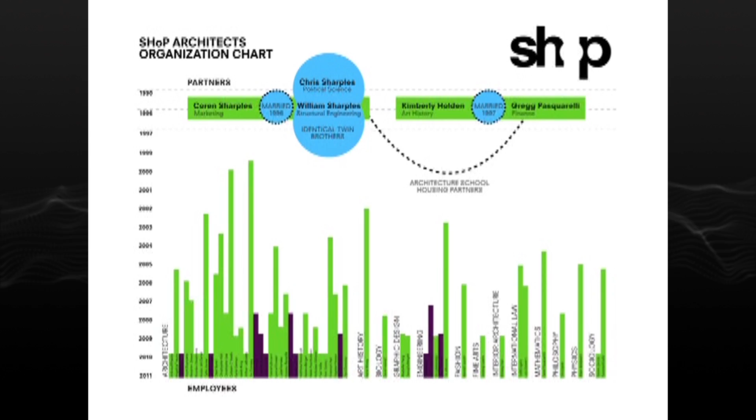The sort of brutal semester at Columbia is the first semester of second year, when you're forced to work together in a housing studio. The beginning of our office came from when Bill and I were housing partners. It was also the same year that A Thousand Plateaus came out, which was a horrible book to read right when you're starting to do housing. And so we struggled through it all year. We had this great semester.

We threw our project out 12 times. And at the end, we said, you're a great guy, but the one thing we should never do is practice together. And almost 20 years later now, we're still practicing together.

So we're now a firm of about 90 architects in New York, and it's changed and grown very rapidly. I'm going to sort of break down the office. I figured the best thing to share with you is how do you go from 5 to 90 in 12 years, because I think that's a kind of interesting story and the things that we did. So there's Shop version 1.0, 2.0, and we're right now starting to launch Shop version 3.0.

So what brought the 5 of us together was this diagram of the last 150 years of architectural history, or of the practice of architecture. When we were in school, which is now frighteningly a generation ago, there was this real division going on. Our professors actually asked us, so what are you going to do? You guys are pretty good. Are you going to enter competitions and do really cool buildings and try and win one, and think and teach and do this stuff? Or are you going to learn how to build and actually be able to pull off a large-scale building? We just didn't understand why you had to make that choice.

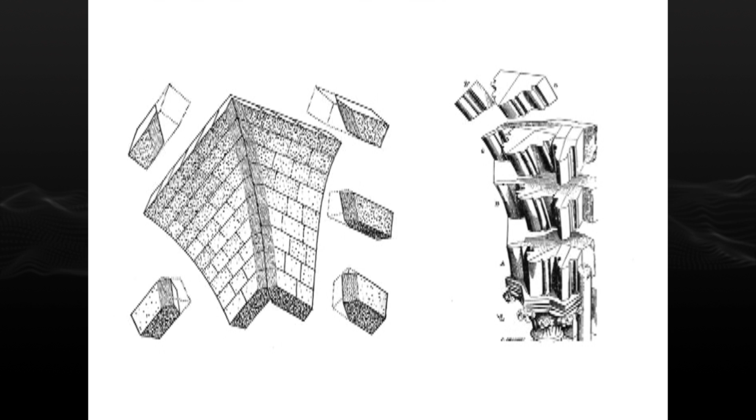So whether it's several of the hundreds of shaped bricks in Brunelleschi's dome, or 3 of the 4,000 uniquely shaped pieces of zinc on the Porterhouse, it was about architects starting to move beyond just the aesthetic or the image of the building, but getting into what we called the thickness, this idea of the depth of all the things that come together in order to make a building and to make cities.

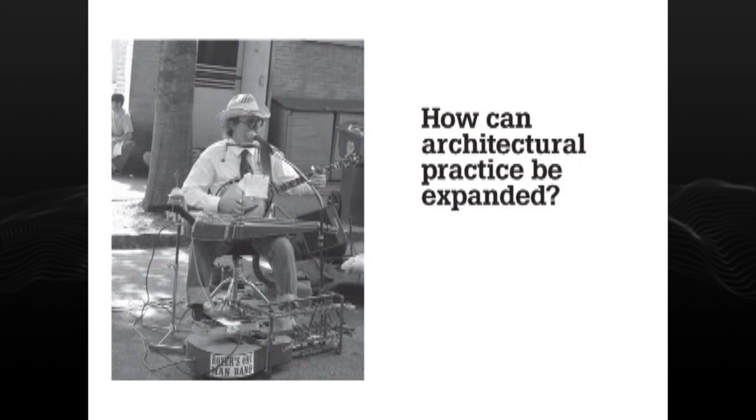So we started to really think, how do you expand practice? What are all the things that we could do? Shop version 1.0 - I think some of the first projects that got a little notoriety were things like we did for PS1 in the courtyard, our Dunescape project, where we had this direct relationship between the performance of a beach, the way in which it would be assembled, and the kind of time and budget that it would be, as a piece of both art, sculpture, and architecture.

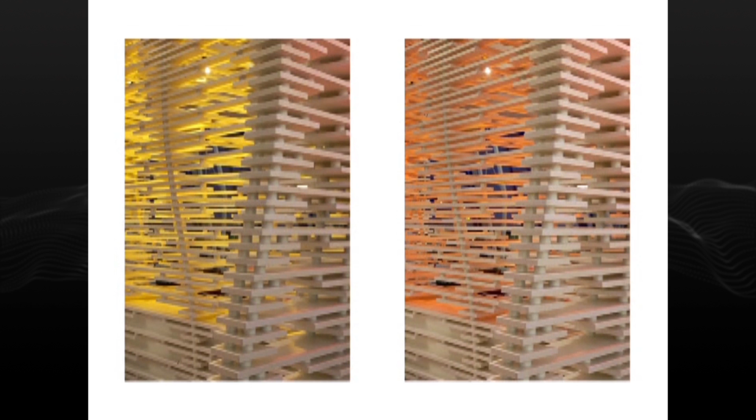Richard Branson saw that piece and asked us to do the first-class lounge at Virgin Atlantic. Again, a very similar kind of system where we had to break - it was right after 9/11 - we had to break the rules of how you actually built in an airport and use technology to get around it, to make this thickness of surface, structure, and program, and support services, and lighting, and aesthetics, and delight into these kind of pre-made elements.

Our park out on the eastern end of Long Island, the first major competition we won to do this, to reinvigorate a town about 100 miles outside of New York City with a series of different buildings, a carousel house. And eventually the last building we did - a lot of this was done with CNC technology, very early ideas about changing the kind of drawing types.

But the last building we did at Mitchell Park was a Folly, a program requested by the mayor of the town to do a camera obscura. We felt that we were now in practice about 5 years, and we were really teaching a lot of this stuff, mostly at Columbia at the time.

And we said, could we make a building? It was small enough, and we had just enough skill, we thought, to try and pull it off. That was a pure performance envelope of a building that was completely derived from the scripts that we wrote, and the entire building would be fabricated by the computer and assembled on site.

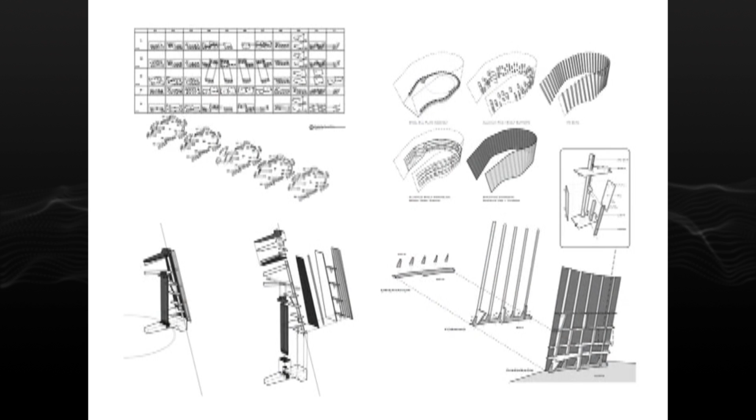And this was when the drawings really started to change. These are actually 4 drawings from the CD set itself. When we finished this CD set and looked at the drawings, we didn't even realize we were doing it, but when we handed it into the building department, they said there are no dimensions on this set. And we realized that dimensions were no longer needed.

And the building went together in 6.5 weeks with 2 men popping it together, every single piece - 2,400 and something pieces, no 2 alike. Every single one arrived on site, pre-cut, pre-drilled, pre-numbered, pre-lettered, basically popped together like the most kick-ass piece of IKEA furniture you've ever seen.

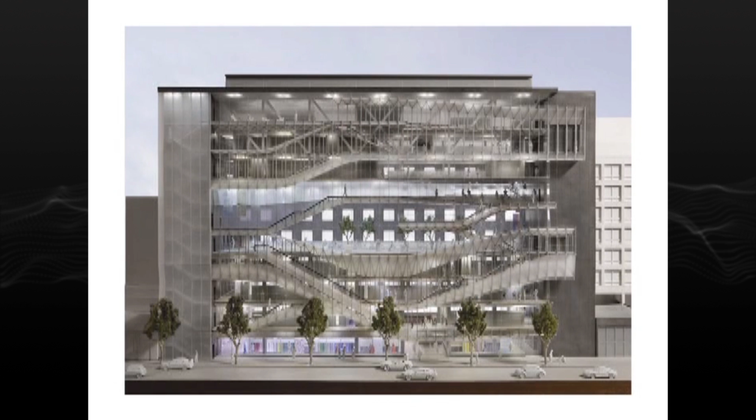And then sort of ending it out, this was a competition we won to do a new academic building at the Fashion Institute of Technology. We were starting to get a chance to build at a bigger and bigger scale. This building takes a mostly brutalist campus in Midtown that's one of the great fashion and design schools of the world, and we said to the president, we're going to give you open heart surgery. We're going to crack your rib cage, open it up, and show what the students are doing, where the entire facade becomes almost like an ant farm of design and exhibition spaces.

This building has been on again and off again for many years. We won the competition in 2002, but we've just heard it might be coming back to life, so hopefully we'll get to build it. The CDs are actually done and have been done for 5 years.

And then even some of the things we've done for clients that we can't talk about, concert halls and secret labs and things that are really bad black ops kind of stuff, but they wanted really beautiful stuff and we're willing to pay for it. So that was kind of all version, I can't really talk about it. I'm sure someone's in here watching me.

So this was all kind of version 1.0, where it was, how do we take that diagram and begin to manipulate it? We're not saying you can do that on every project, but it was integrating with the subcontractors, integrating with other designers, integrating with our clients in different ways, with cities in different ways, with manufacturers in different ways. Different kinds of projects had different opportunities to do that in different ways.

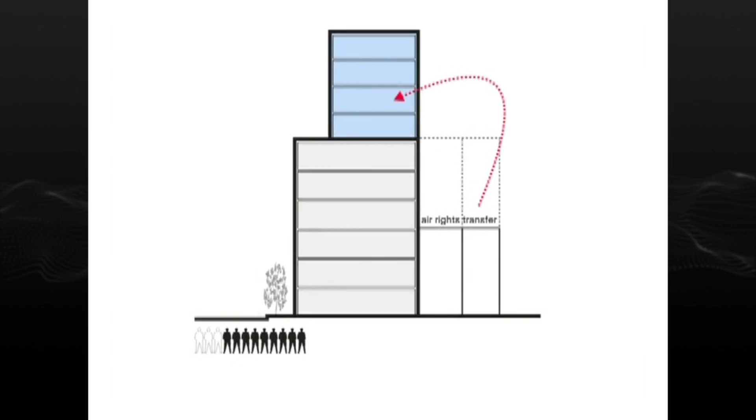Now the problem was there was a 120-foot height limit in the district, and there were setback requirements from the side streets, so there was only so much you could go, unless you started to push it out and cantilever over the buildings to our south. A few less people thought of that idea. And of course, the more you could cantilever, the more revenue you would get, until the cantilever got so big that it started costing more — a rate of diminishing return.

We got control of the project, and we did all that ourselves. Then we were like, how are we going to pay for this now that we've won the bid? We really didn't have any money. So we talked to some of our clients and asked if they would joint venture and put money in, and we asked friends and family, and we built a fund, and we went after it. We ended up forming a joint venture with Jeffrey Brown Associates from Philadelphia and New York.

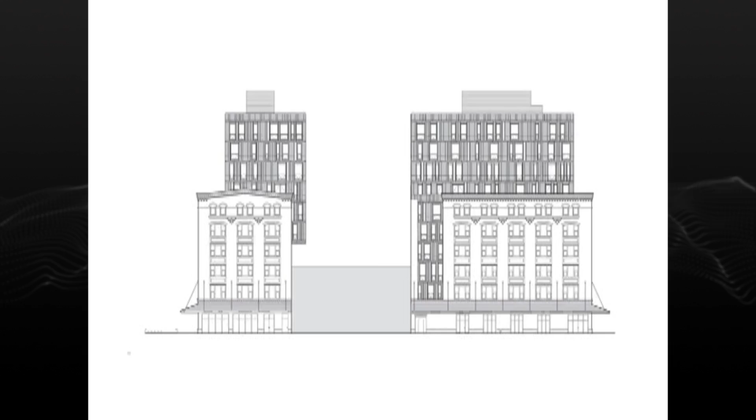We knew we would have two volumes, a historic volume on the bottom and a new volume on top. We felt our idea of contextuality is that the building should not necessarily look exactly like the building next door, so let's just do a super contemporary box on top. We wanted to try a metal building. We hadn't done any metal yet.

We didn't want any kind of painted material, we wanted a raw, natural material, and we had settled on the idea of a zinc building. So we went to zinc facade manufacturers, and the costs were through the roof. We didn't understand why it would be so much more. Zinc only costs maybe 10% more than stainless, which is 10% more than painted metal, so why would it be 50% more for the whole facade? They said, well, we don't really care, that's what it costs.

So we said, well, where does zinc come from? They said it mostly comes from France. So we got on a plane and went to France, found a zinc manufacturer, and bought 1,000 sheets of zinc that was 1 meter by 3 meters in length, brought it back to New York, and designed the entire building.

Here's a 1 meter by 3 meter sheet, so that one unfolded panel, two unfolded panels, or three unfolded panels, plus the bottom slab cover would fit. We had a 97% use of our raw material.

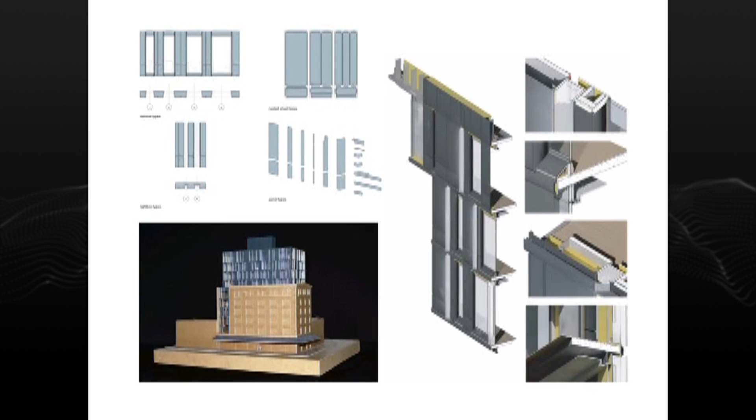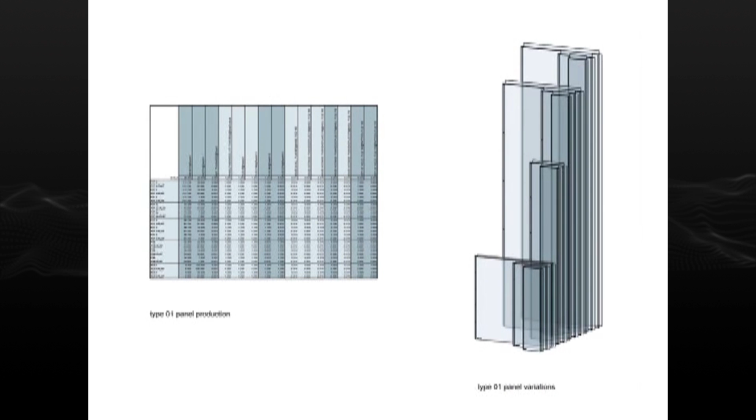But it was the first time we used SolidWorks, more than a decade ago. Instead of having to draw shop drawings, it was just a series of Excel spreadsheets, and it went directly from the digital model to the fabricators. The pieces were cut, they all had a code system laser cut into the front, which became the instruction set for how to put the building together. So the architectural detailing of the building, those instructions, still remains there.

We actually used carpenters to install it. We started at that corner, went all the way around the building, got to the other side, and we were 1/32 of an inch off. We were like, okay, that's probably good, and we should do this again. It was amazing, and we did it with zero shop drawings whatsoever. And so the building went together.

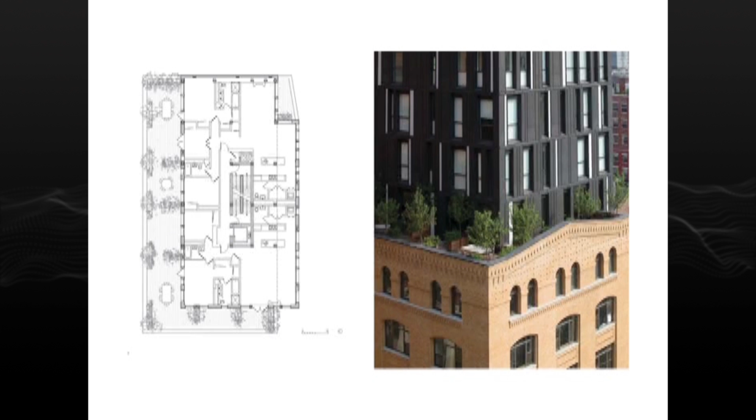It's 22 condominium units plus a retail space. We did the design, the financing, we helped manage the construction, did the model units, the marketing materials, and brought it to market. You can see the typical units, there's a central core, and the typical units have 3 exposures with big, large open spaces. The core becomes the lateral stability of the building, so no columns and no trusses holding up that cantilever.

One of the things we felt was really important was playing with the idea of depth on the facade itself to get this notion of texture. Sometimes I find metal buildings can be a little bit taut. I mean, sometimes that's very beautiful, but we really wanted to play with that.

So we set all the windows 14 inches back, and then we were like, wow, that's going to make a lot of ledges, and we have a pigeon issue in New York. So what are we going to do? So we called the Museum of Natural History on the Upper West Side, and we asked, is there an angle of repose that a pigeon will not fly onto? And they said, in fact, there is.

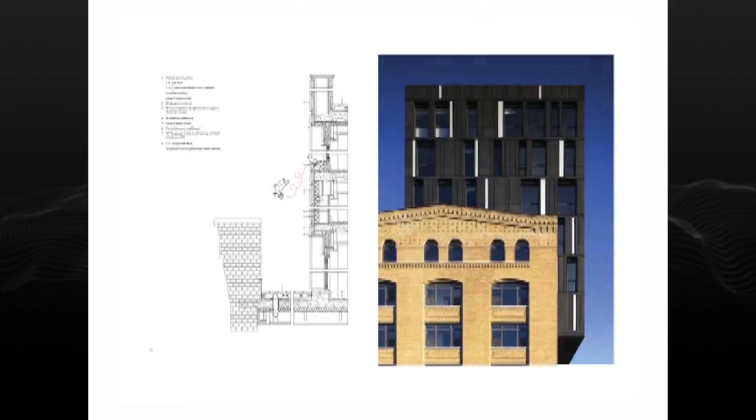It's 34 degrees. So if you look right here, these are actually parts of the drawings from our set, and you saw that everything was coded like F and P, different codes for it. These elements were labeled PS for pigeon slide. And it's amazing, because if you're in the building, you actually see a bird come and land, and it goes right off the edge. It finished in 2003, so it's 8 years later, and I'm really proud to say not one turd on the entire black facade.

So you could see the building, the collateral materials we developed, the lobby spaces, and then this whole idea of the building that lights up at night and has become an anchor for the district—something that we're incredibly proud of.

We brought it to market, sold it, and the interesting thing was—here's the biggest issue I have to talk about, the most important thing I can share with students especially—that as a young practitioner and a teacher, I talked to my friends and colleagues, people I have tremendous respect for, and I was like, we're thinking about doing this. And I have to say, at least half the people were like, you better watch out, you're getting in bed with the devil, this is a slippery slope to hell, your designs are going to go down the crapper because of this.

And I have to say, we were really kind of scared, to be honest with you. And I went to my dean, my former dean, and I said, Bernard, what do you think? And he's like, oh, don't listen to them. You have no idea—Corb did development, Loos did development. They all did this stuff on the side to help fund their other work. I didn't really know that, and he went through a litany of different architects, and we took a shot.

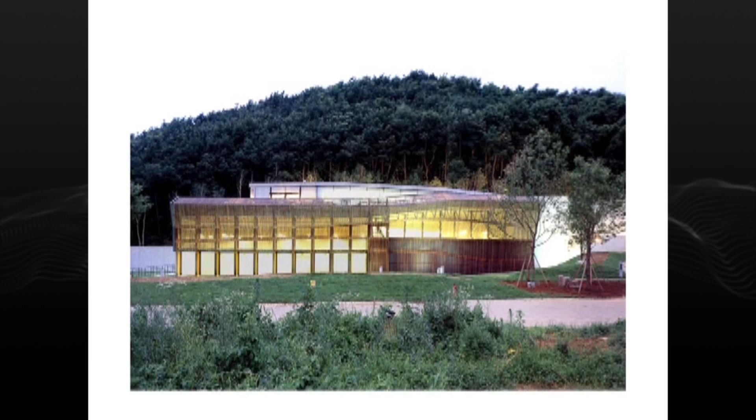This is a sort of book house, cafe, exhibition hall, part of the Heyri Art Valley, outside of Seoul, South Korea. This was a building where we could only bring it through design development and hand it off to contractors. So what were the kinds of drawings we'd have to make to ensure a certain level of quality?

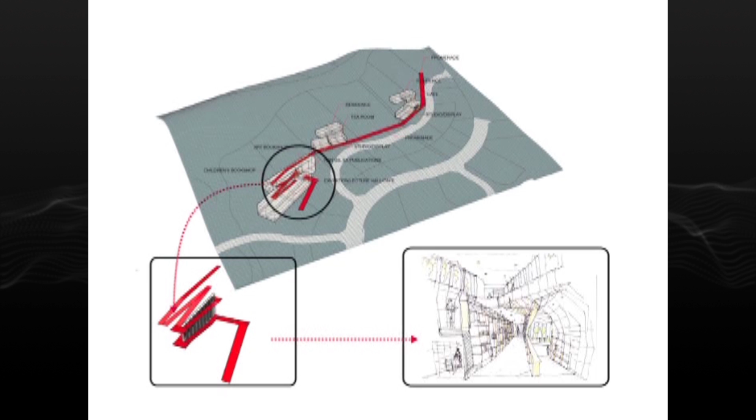The interesting idea of the house was that you actually entered off the roof, and then the bookstore, Hangil-sa, which is a book publisher—you go around a three-story high wall of books, which is the bookstore, and you come out at the bottom.

These are kind of the original sketches of it. We got this building built very quickly without us being on top of every single element. A lot of it was taking those ideas of full-scale template drawings, making it simple enough that it could be executed easily.

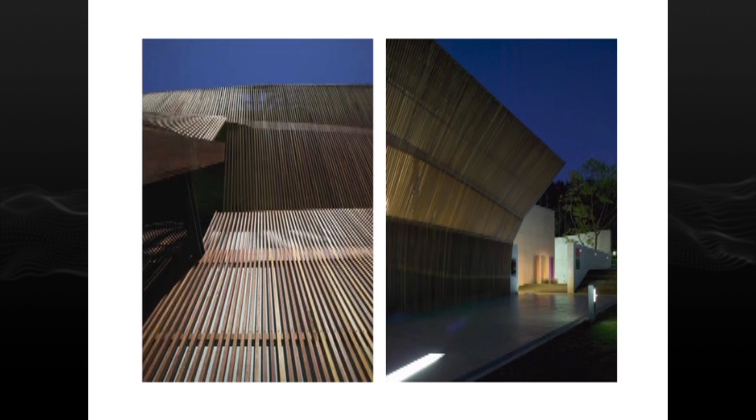Here's the entry as you come in at the top, and the screen wall. It was just a series of poured-in-place concrete walls, then a big ramp, and then this big scrim that rolls across the front of the building.

But it was really terrifying for us to let the design go, where we were so used to being on top of every single aspect of it. And it turned out well.

There were definitely some substitutions that were made, but for some reason, I guess the way that we had drawn a few things, the key elements that really mattered to us stayed.

And the key, I think, was to make this wave very simple, where we developed this kind of joint that could rotate and was easy for them to put together off the full templates. But that was kind of our first public building of any scale that got built, and we're just proud of the way it sits in the hillside.

You enter off here—that's actually the front door, down, around, and out—and the way it glows at night.

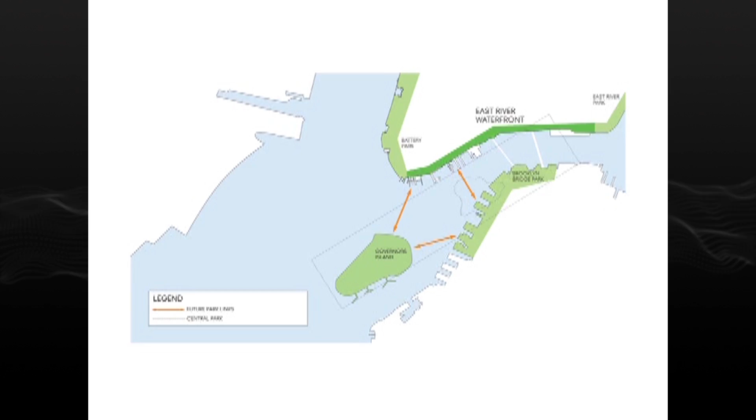And even though 3 different designers could be there, the city has to think about this—now you have so many people living in Lower Manhattan and Brownstone, Brooklyn—this is as important as Central Park in a certain way.

So there was a kind of 45-year history of failed projects on this site from some of the greatest architects in the world. And we were saying, well, if these guys couldn't do it, what was the problem? What should we do? So we analyzed every one, and the thing that we got was that every one of those was a kind of big object clipped onto the side of Manhattan.

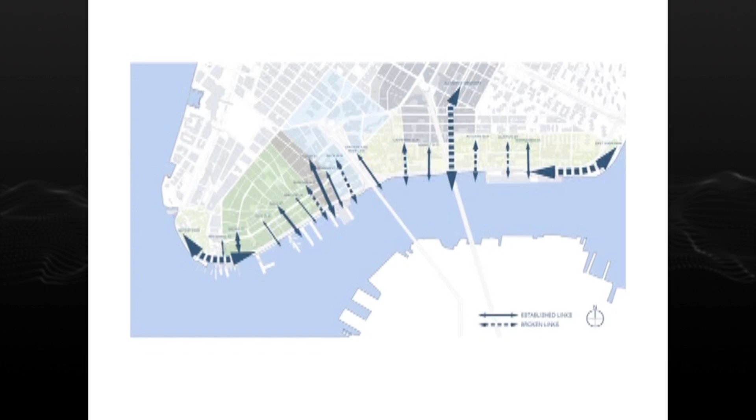What we felt was the big problem was that you had 7 different neighborhoods, and all you really needed to do was get these cross-grain connections going so people could get out to the water. Because if you lived on this block on the Lower East Side 10 years ago, you'd typically think, if I'm going to go to the river, I'll go to the Hudson. Very few people would go to the East River. This is a place desperate for open space, but people just didn't go to it.

We had some places on the Lower East Side where we counted up to 14 layers of chain link fence between where people lived and the waterfront. So we said to the city, look, we also did an in-depth mapping of different kinds of existing infrastructure and how to take advantage of them.

We leased a helicopter one day, a photographer's helicopter, got in harnesses, hung out, and asked them to fly over the shoreline of all 5 boroughs of New York City. We made a taxonomy of shoreline types, looked at them, and tried to figure out what works, what doesn't work, and what we could adapt, and lessons learned for Lower Manhattan.

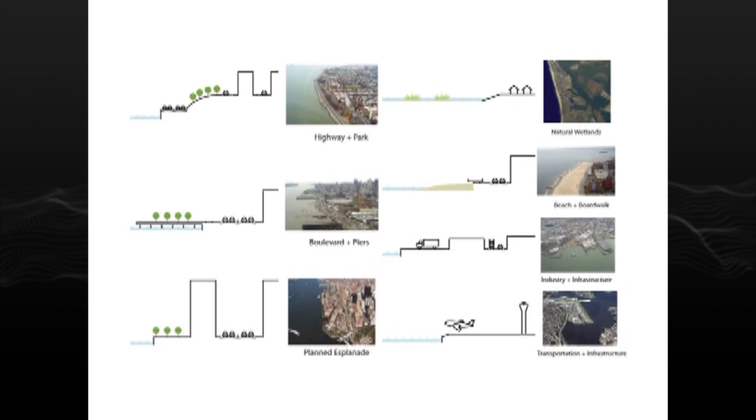The two that were most interesting to us were parts of Midtown, where the buildings got close enough that there were ideas about views and a relationship between a highway, views, and the waterfront.

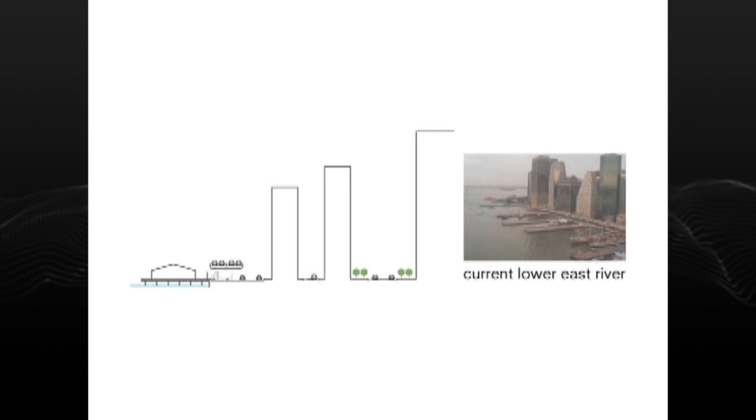So we said to the city, look, here's your current condition. You've got Water Street, Front Street, South Street. Basically this is the last street that kind of works. This one's sort of a service street. And then you have the parking, the highway above, the chain link fences, the sheds on the piers.

But at the end of the day, the thing we realized was most damaging to making this work was the distance between this curb and this curb. Because it was a non-signalized street that varied anywhere from 110 to 160 feet wide underneath an overpass, it was dangerous. People were afraid to just cross it.

So we said, get rid of the parking, add trees wherever you can. We looked at getting the bike lane going to finish the circumference of the Manhattan bike lane. And then we tried to get the FDR taken down, and we spent a year studying it. But for many, many reasons, they didn't want to take it down.

So we said, okay, we could either complain or think of it as a free roof. Let's start building a series of boxes that could hold programs, so you could bring the activity and what's great about the city out to this waterfront park, or esplanade, if you will.

So again, the idea: plant trees where you can, shrink South Street to a 60-foot standard New York City side street, build boxes so it mitigates the presence of the highway above. And you cannot expand the size of the piers, for shading issues and environmental issues.

So we said, any chance you can, start building double-decker piers so we get a 2-for-1 of open space for the public wherever possible. So they said, well, who would ever want to rent space underneath the FDR Drive? And we said, well, we think lots of people could use it. It could be community, cultural, recreational.

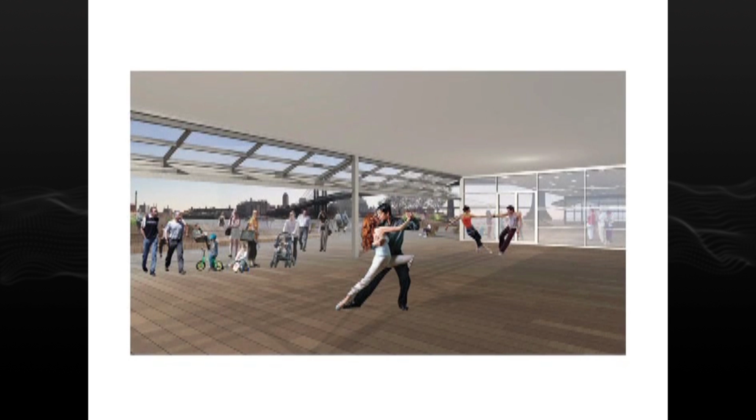It could even be this. The idea would be that these could open up and these activities could spill out onto the esplanade, giving it life in the cold months as well.

So they then had a second competition. Everyone liked the plan, it was a big success. They then had a second competition as to who would actually design it and lead the team through the process of building it.

Richard Rogers was busy working on the Trade Center and the Javits Convention Center, and we had a long conversation. He said, I've got so much work, you guys can handle it. I said, are you cool? We're good, we can go after it on our own? He said yes, and so we teamed with Arup, Ken Smith, and Shop. We competed again, and we were fortunate enough to win the competition a second time.

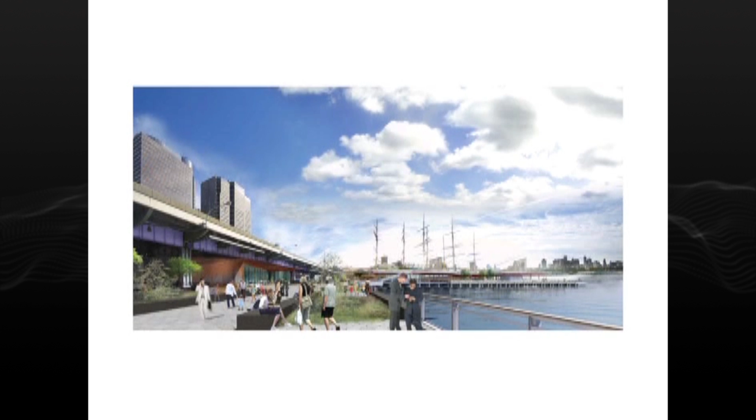So the eventual design ends up looking something like this. There's a series of precast black concrete walls that allow us to build up the soil, because these are platforms, so there's actually no soil underneath. The pavilions get built underneath, and there's a series of railings and chairs which I'll go through. We eventually design and get built a double-decker recreation pier.

There were other piers. There's a giant sanitation shed hidden behind this big screen wall with swings. The rail moves in and out, and it's this kind of kit of parts that responds to the neighborhood behind it.

One of our great triumphs, another battle for me personally, was being frustrated when on an esplanade, because when you sit on a standard chair and look out at the water, the 42-inch rail is exactly where your eyes are, blocking the water. So I spent 3 years convincing the city of New York that we should only install bar seating along the entire front, and that the rail should vary from 6 inches wide up to 18 inches. You could sit there, have your lunch, flip open your laptop.

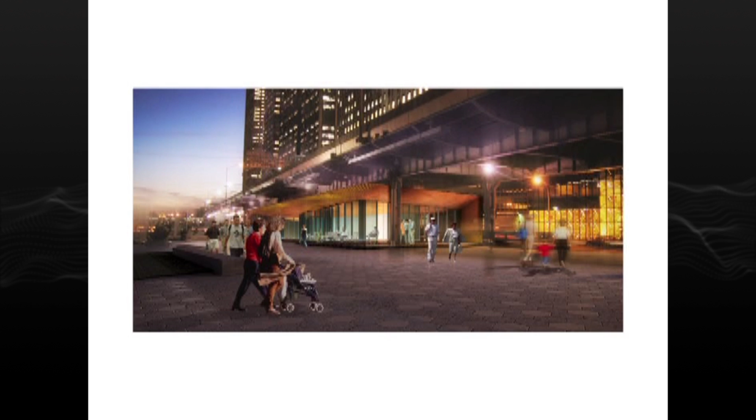We convinced the city to paint the girder of the FDR through the whole park lavender. I'll explain that in a second. The pavilions are these weathered steel, perforated boxes that sit under the FDR and open themselves up onto these front porches, and they flank— excuse me.

So this was a key part of the design. For me, I always feel like when you go to the water's edge, especially at night, whether it's a bonfire on the beach or down to the riverfront, there's this kind of darkness, and the city recedes behind, or the beach dunes recede behind you, and it's about the stars or the moon or the boats out there, and it had to have this darkness.

So it was critical for us that there would be no observable lighting anywhere, and that all lights would be buried and all lighting would be reflected off a surface. So actually the whole idea of the lavender beam is that the lights are hidden up in the edge of the FDR.

If you're sort of on a second or third date, this is the best place to go, because everyone looks good in lavender light, I have to say.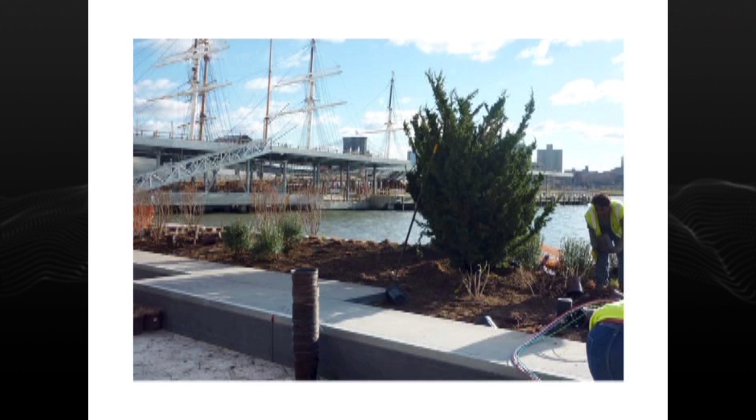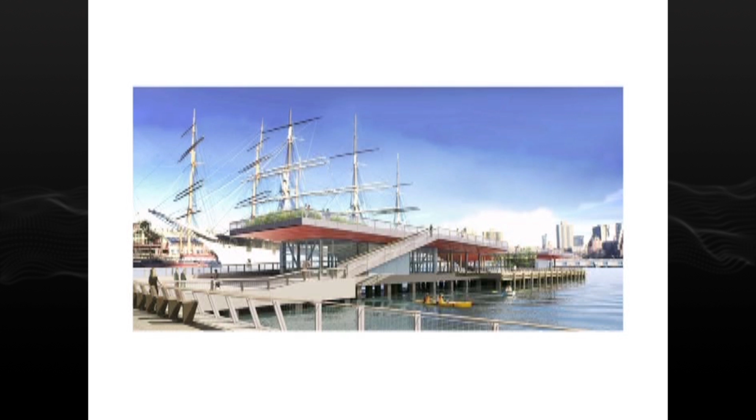Some more of the plantings, and then looking at the pier under construction over here. So this is the rendering of the pier. It's this kind of idea that the esplanade continues out. It has maritime activities - this would be a maritime education center for local school children, ticketing, a cafe, and an ice cream parlor.

These two glass boxes suspend what we call the giant tuna belly, this great undulating red and pink scrim. All the lights again indirectly lit up into the scrim, and then above it's a complete wooden deck. So the materiality changes when you get above, and the glass boxes have green roof lawns that you can picnic on.

So again here you can see where the wood drops down to the middle part. The ADA ramp continues right up and creates an amphitheater so you can look north and see the decks of the historic ships in the South Street Seaport Museum. As a kid growing up there, I always looked at the ships but could never see what was on deck, so I thought that would be kind of good.

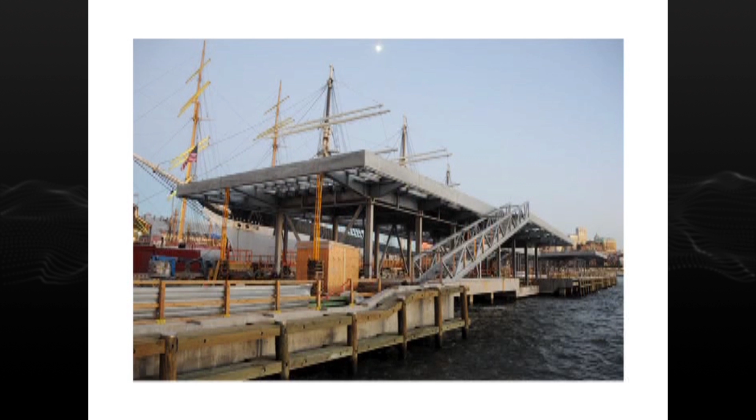So they put all the piles in. Steel went up, all galvanized, hot dip galvanized. I tried to get photos because it's opening in two weeks, but I just didn't get them into the presentation this morning. They'll be in the paper next month and we can send some up to you guys.

So here we are doing public work, and there's this idea that in the middle of this whole project was a Rouse development - like a Faneuil Hall kind of thing called the South Street Seaport and Pier 17 Shopping Mall, which is this awful place - I hope I don't offend anyone from Boston, but the joke in New York is no New Yorkers go there because it's the place that most reminds them of Boston. It was designed by Ben Thompson, of course.

So they came to us and said, what would you do if we could just knock this thing down? This mall has lost $100 million since it opened in 1983. We said, well first of all, it's a mall, and malls don't really work in New York, but it's at such an incredible site. We understand why they made the decisions they did - it was a very different city at that time - but the historic district is here. These were the old fish market buildings, which weren't particularly pleasant. But still, why would you make your way all the way down here to go inside a 3-story enclosed shopping mall on the water in front of the Brooklyn Bridge? I think we might rethink that differently.

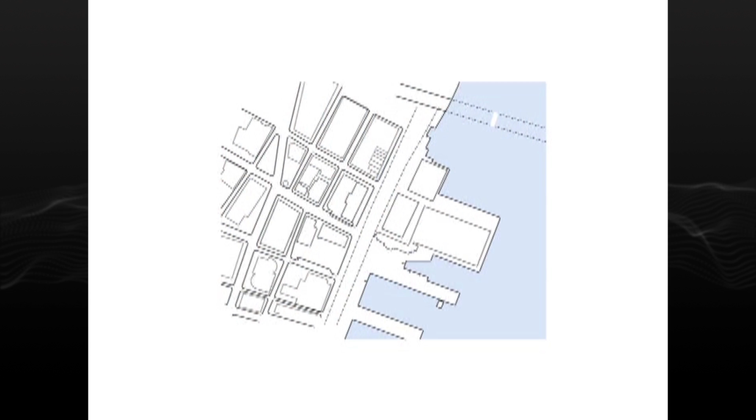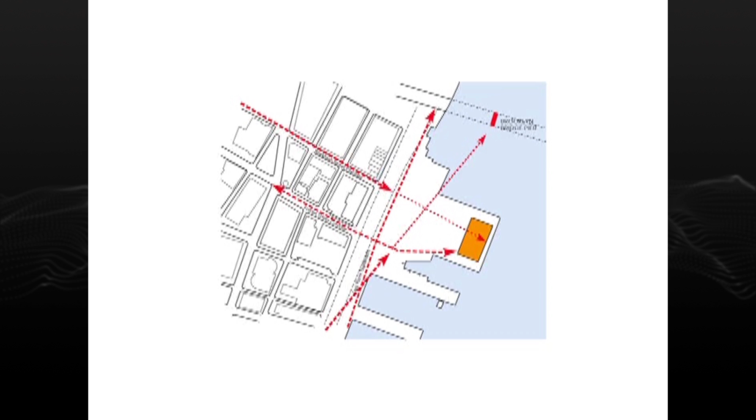So here we go, we said what do we have to do? Take the historic building, move it and reestablish it. I know this is like a total no-no in the preservation world, but we figured we had to take a shot. So make it a food market building, restore this building, make it something great, put it out on the end, and let's get a real street pattern going underneath the FDR Drive. Let's get the Esplanade going through, open up the views to the pier and the Brooklyn Bridge, and let's build this and break it down more so there's actually a kind of neighborhood.

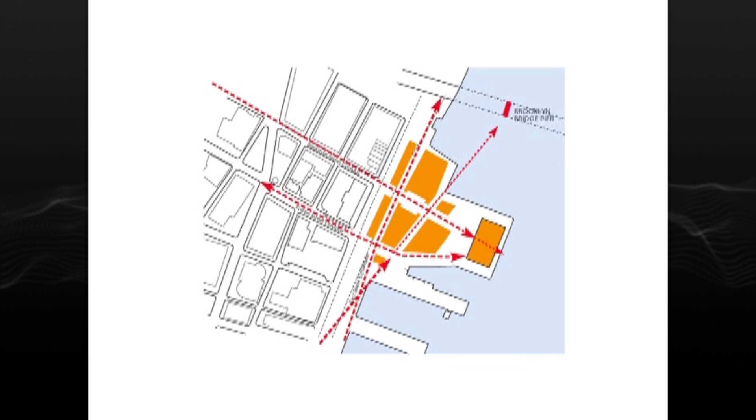These are a series of pavilions under the FDR Drive. This is a kind of 18th century alley. Actually we were planning on continuing it through this building and making this kind of street grid that you could walk through. And again, some of the same ideas - reducing the size of the streets.

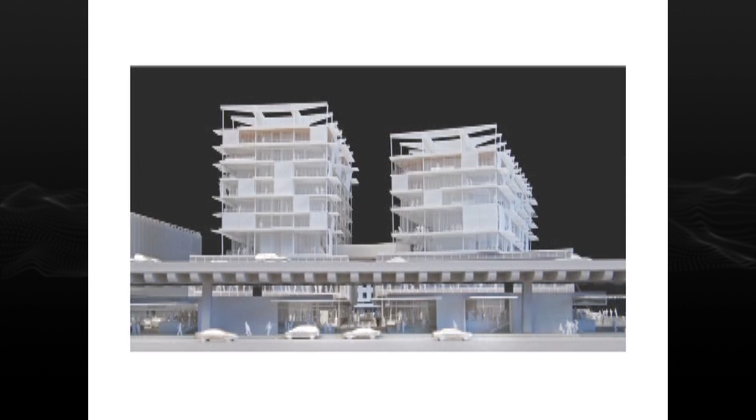Here are the pavilions, and you're looking through into this neighborhood. Then they wanted a small boutique hotel above a kind of retail base, so we said float these two towers off of large gantries above this two-story high retail zone. You can see the Esplanade going through, the retail and the boutique hotels above.

And then for the hotels, we said use airplane hangar doors, bifold doors, and give everyone a remote control from their bed so you could sit in the hotel room and open and close your shutters. These would be the views walking through and looking at the Brooklyn Bridge.

Then, to shift as much of the volume and the FAR, we said give a 4-acre open space out on the pier in front of the big market building with this incredible view of the bridge, and shift the FAR into one slender tower. The height limit in the area was 120 feet, so we proposed 495.

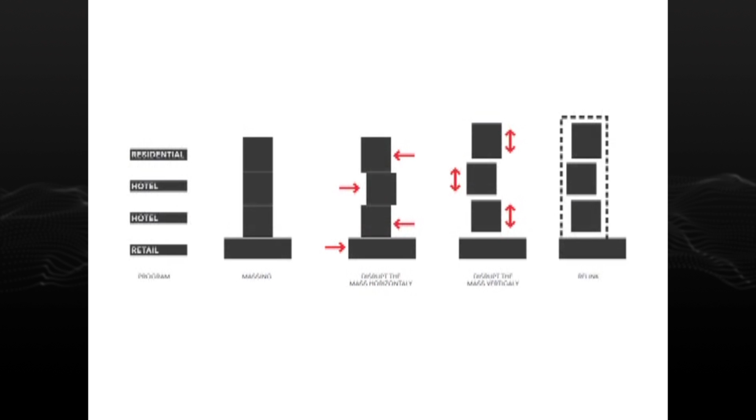We said we've got to break it apart into these three programmatic elements, and build this building with an exoskeleton that changes from top to bottom based on the program. It holds these three shifting glass boxes in the middle of this terracotta-clad steel exoskeleton. So again, the shifting of the pattern, and the view where you could see it from the bridge.

So the restored market building, the 4-acre open park, which was designed by James Corner—he worked very closely with us on the whole project—the mixed-use building with all the retail at the bottom, the boutique hotel, the 5-star hotel, and the residential on top. All for a bargain price of $1 billion.

This was a project led by General Growth Properties, who had bought the Rouse Company in early 2003. And some of you may or may not know, but in 2009, $66 billion market cap General Growth Properties became the largest real estate bankruptcy in the history of the United States.

And it wasn't because the company wasn't doing well—the company was actually making money all through the crash and the recession. It was just that their senior management had decided to buy everything and finance it with 5-year debt. So it all came due in 2008, when they went on their big shopping spree in 2003, and there were no loans to have.

The whole thing collapsed. So the company emerged from bankruptcy. General Growth Properties is running the shopping malls, which are successful—you know many of them all over North America. And they split off into a new company for all the development deals. The properties went into a company called the Howard Hughes Corporation, because they owned Howard Hughes's old ranches outside of Las Vegas, the Summerlin properties.

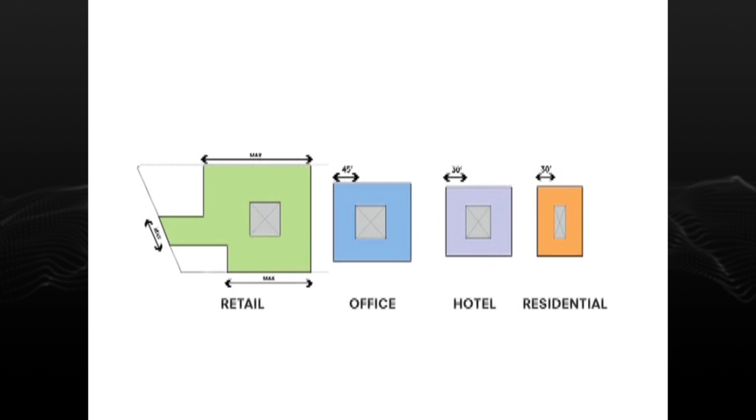But it was a very simple mixed-use kind of building, and we basically took the ideas from the South Street Seaport Tower and tried to apply them to this competition. So we said: optimize floor plates for each program, stack the amounts of programs in the brief, pull them apart and float them, and connect them with an exoskeleton.

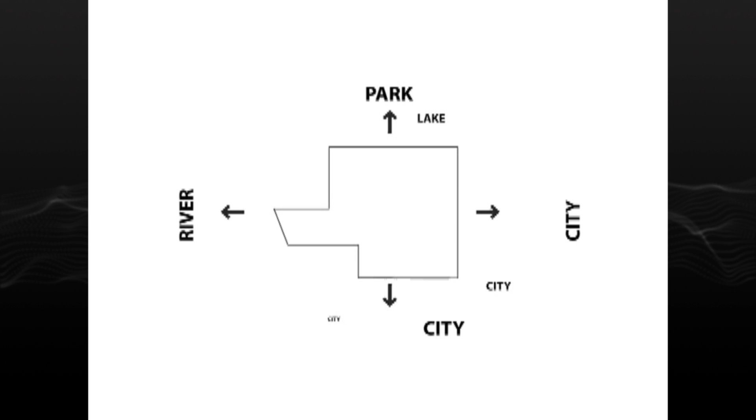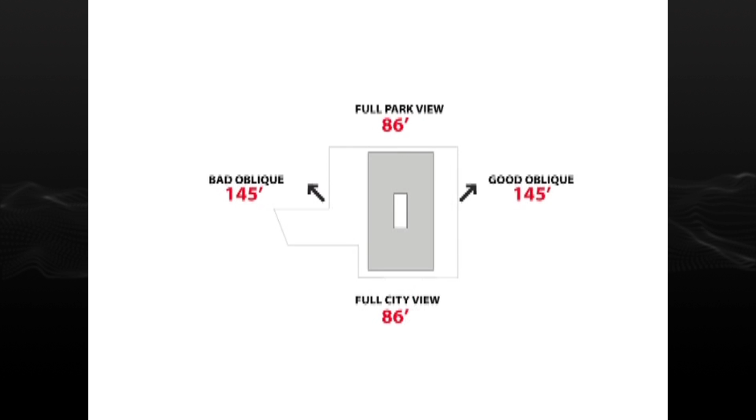And then there were different kinds of views. The brief called for the building to be in one particular position, which meant orienting it towards the north. We made an argument that if you thought about the oblique views and the other views you got, and tried lots of different ways, we felt that if you turned the building and made it into this shape, you'd maximize the views - you start to think of it differently because you eliminate all the bad obliques and get as much good as possible.

So we started thinking about performatively how much we could push and pull the folds on the exoskeleton and still make it hold the building and conform to the zoning issues. We took a similar idea to the Seaport building tower and did this kind of exoskeleton. The hotel in the middle has a smaller floor plate, so it actually floats in from the exoskeleton, and it's connected by balconies.

And this was the design of the building. So you had offices and a hotel, which becomes kind of like the restaurant - the shared programs of the restaurants and lobbies and bars here, and then the spas, pools, and workout rooms shared between the residential and the hotel. And of course, in these buildings, it's all about the core and making it work.

And so from the park, what the building might look like with this kind of bronze inset and this white terracotta top, the office plates, the view out from the lobby.

If anyone can tell me what city that is, there's a bonus. It's Paris, which is not one that we all know off the top of our heads. Anyway, the kind of idea of the pools.

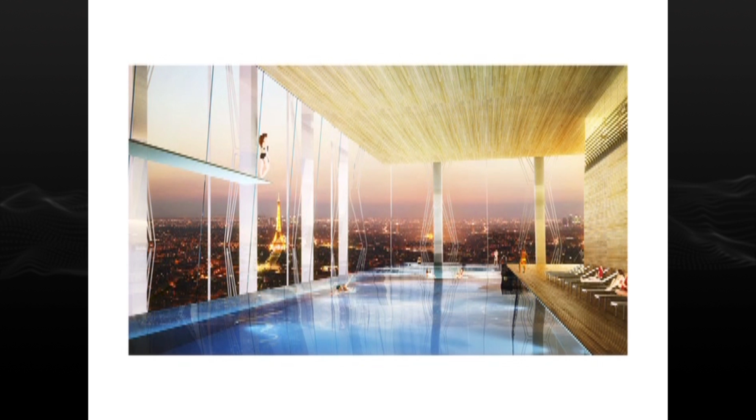We actually - the first time we presented this, someone was diving off the diving board, and it looked like they had just jumped off the building. Client wasn't happy. And the kind of housing and how it worked, and the building as it turned around.

But the building is amazing because all four sides are completely different, so no matter how you look at it, it really changes. And there's something there - that's 3 weeks of work, to figure it out that much. And we built this really amazing model.

So it came down to Herzog and SHoP as the final two, and Herzog got the project. But I'm banking that they'll bust the budget and they might come back to us. So that's why I'm not showing the city and getting in trouble with the client.

This was a project, again, for a London headquarters.

I cannot say who it is, but it's a company in New York that wanted to build a headquarters in London.

So, for this 3-week competition, we thought quickly about the idea of the grid versus the medieval plan, the vertical city versus the horizontal city. This is to scale, by the way—I never knew how small the Gherkin really was until I looked at it there. The client wanted an iconic building, so we asked how you make that happen in the horizontal city. Well, you have the tower, you get a square in front of it, or you put the courtyard inside. That becomes your iconic element.

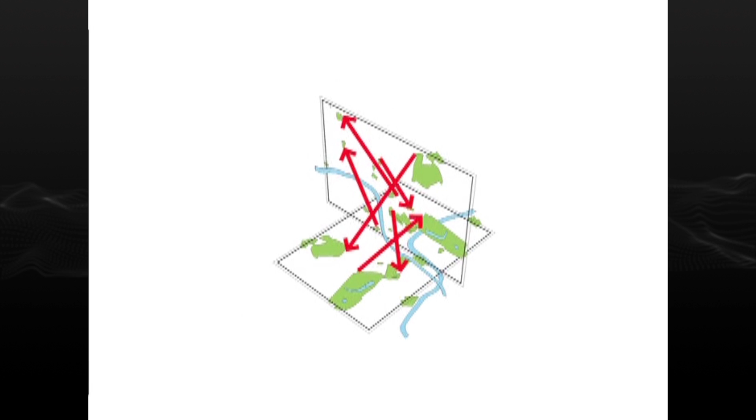We said, what if you turned that idea vertically, thought about parks through the building, made these kinds of connections between them? The site was very close to St. Paul's, so we had real difficulties with view corridors and height restraints. It was tricky—how do you make an icon when it had to be squashed down like a pancake?

We were very closely connected to 3 tube stops, and there's this great little Wren church. Continuing on, there was a Roman ruin actually on Walbrook, a temple. So we opened up the site so that when you're moving through, you can see all these elements, continuing the old medieval streets.

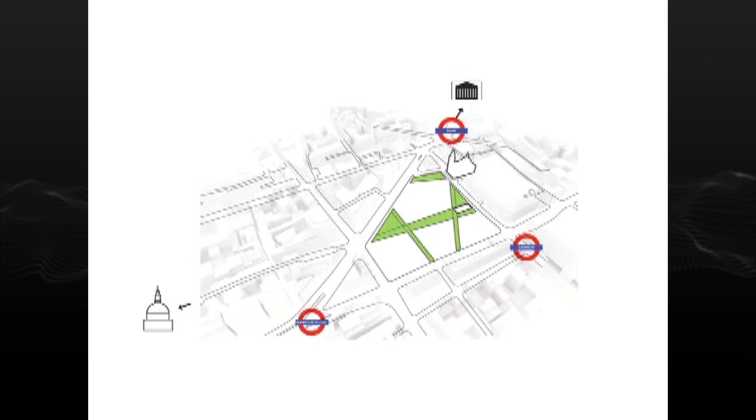It was 2 buildings—one was the headquarters, one was an ancillary building. We asked what's the relationship between those two buildings. I think we ended up at cousins, or sisters.

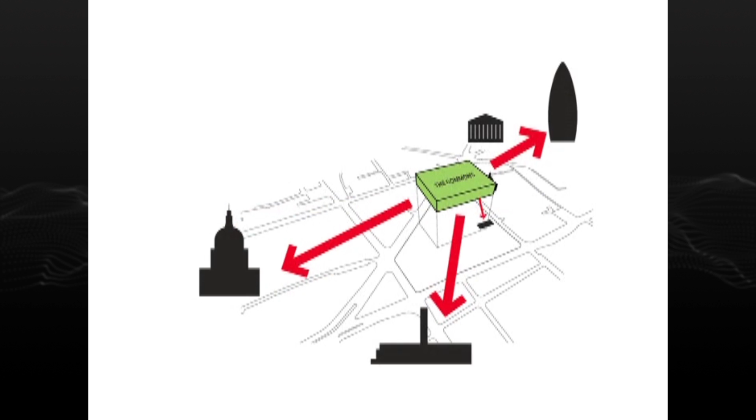We said, take the park, put it up in the air—it's the commons. This is the way this company works: everyone arrives at one place, and then they move through the building through the day. The commons reaches out to the icons it sees in the sky, so that wherever you are, you immediately know you're in London, because this is a global business and a lot of employees travel around the world constantly. Then from each of the icons, it informs the shape as it goes back on the icon, if you will.

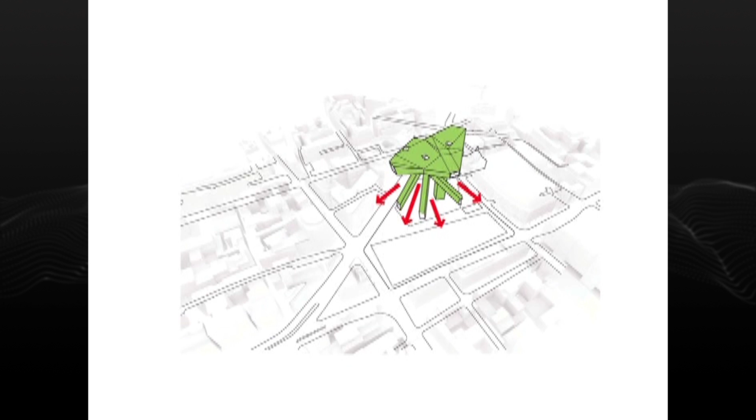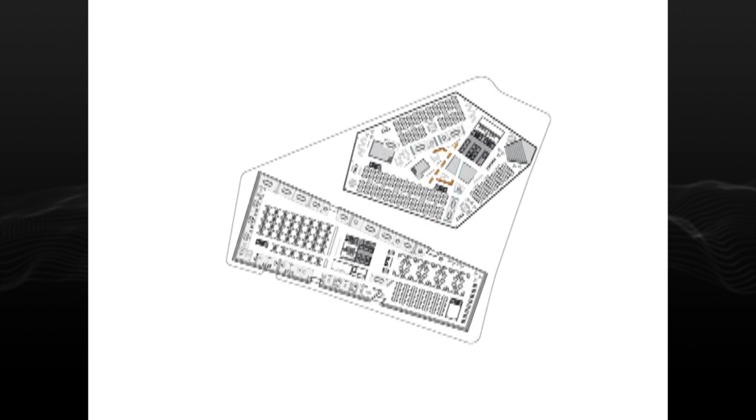We also planted a sheep farm—pastures with sheep grazing on the roof of the building next to it. They told us they hated that idea in the competition, but we fought for it anyway. Then there's this big open covered garden so that when you're eating, you can eat outside but still stay protected from the London rain.

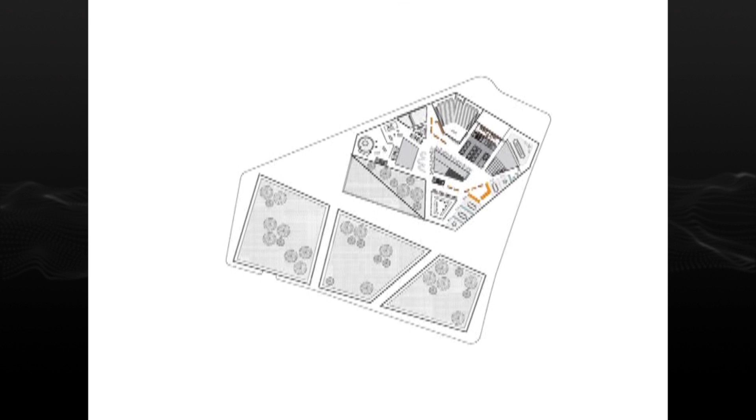So again, the commons plan—these are the sheep pastures, and then looking at it.

So this one came down to Norman Foster and Shop, and Lord Foster got us in London, so it happens. But we were close. We were close, and I'm sure you'll see ideas of this kind emerge in some of the other work.

So many of you don't know, another company we worked with for a long time is Google. We were commissioned in 2006 to do their first ground-up building. The founders asked us to build a building that would be, they said, if you build the LEED Platinum building, we will have considered that you failed. We want 2 or 3 generations past LEED. We said that's going to be a tremendous amount of research. They said, go for it.

And we did research for about 2 years. And again, with the 2008 crash, the building went on hold. We've just finished a couple other buildings for them. I can't talk about more like interior fit outs, but hopefully the main building will come back.

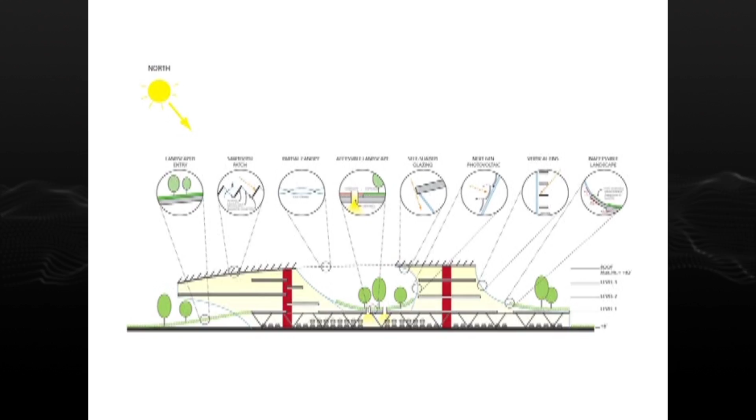But the main idea for the building was this sort of large energy blanket and this kind of series of bringing in different volumes, sort of carving deep into the building for the right kind of office space and connectivity and ramping, plus the way of dealing with the cars on grade but berming up the land on each side to sort of cover the cars. There's a lot of performative reasons why they had to do that. It was a full base isolation building, among other things.

But withstanding, these are the concepts from the Google building that we did, and what the building looked like when we had schematic done in 2008.

The building went on hold, and so we entered a different competition in 2009 for an innovation hub in Botswana, Africa. It was a government complex in Gaborone, outside of the capital. So we basically said, let's just take all the stuff we had learned from all this research and try to apply it to the climate in Botswana, Africa.

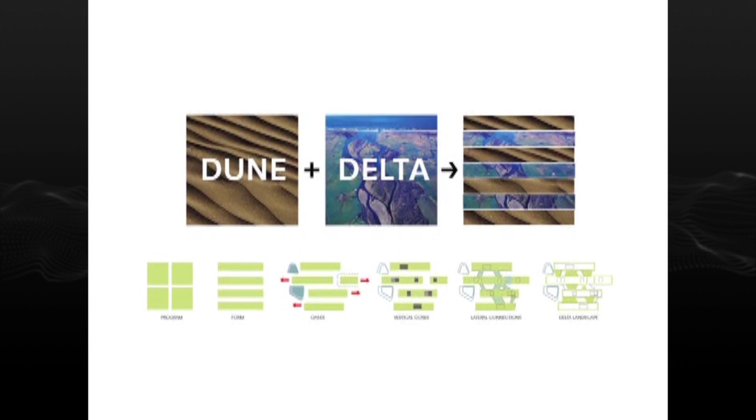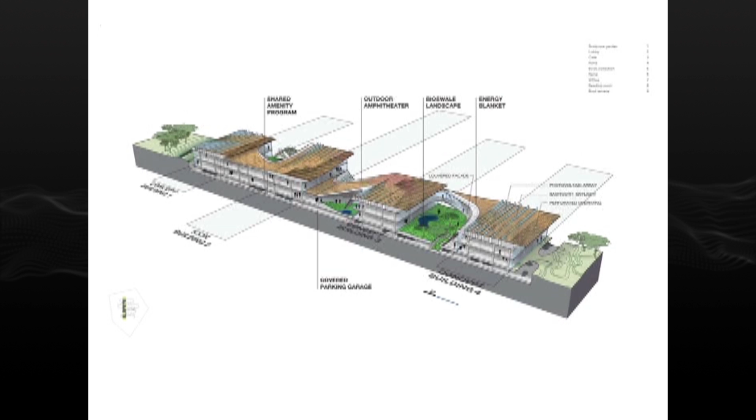Their 2 most prominent landscape features are sort of the dune and the delta, and it was this idea of striating those two and making a series of buildings with the same. They wanted a high performance, sort of green building. So again, this idea of an energy blanket in Southern Africa, the kinds of pods, water collection system, the berming for the parking, and these buildings that got connected. And so that was the competition-winning design, the image.

So again, all these ways of catching prevailing winds. This would be the largest green/brown roof in Southern Africa.

The coolest thing is that there were these amazing 200-year-old trees all over the site. So we proposed leaving the trees in place and building the parking below, and then leaving these holes so they come up through the middle of the courtyard spaces and give the shading. Because in the shade, the climate's actually much nicer than it is in here.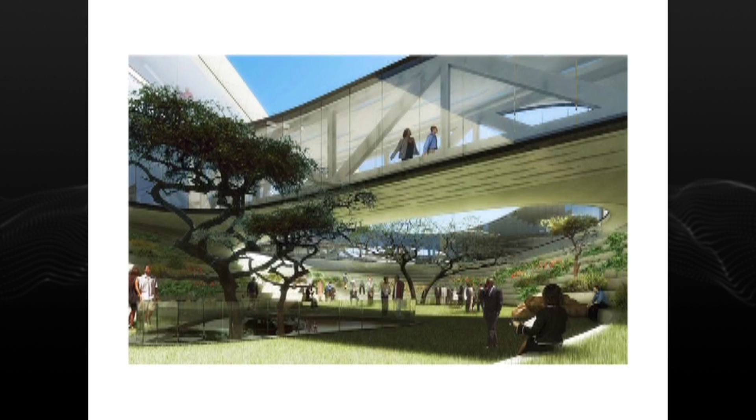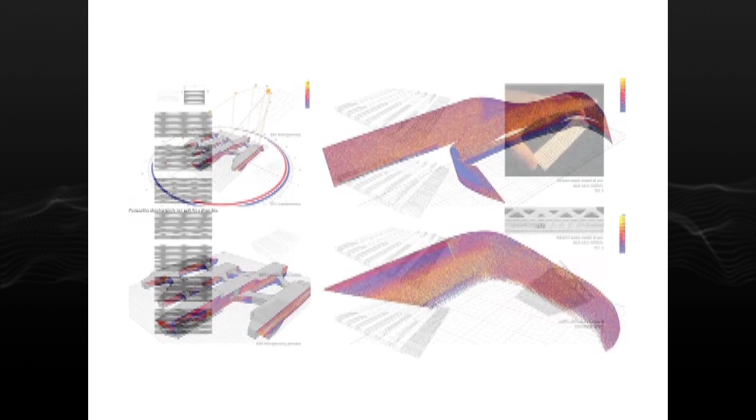And the idea is that you could sort of walk through these glass tubes, be in the treetops, and then the parking happens below, and these are all sort of seating areas that are part of the performance of the building itself. A lot of the shapes and forms come purely out of the CFD analysis. The hundreds of different basket weaving and layered types and pieces really are how the building is being articulated. And so we won this competition.

This is sort of the current state, probably the end of DD. It's a 350,000 foot, what they call the icon building, in a master plan of 3 million square feet. And basically the government of Botswana is incredibly progressive, a stable democracy for over 45 years, with amazing education.

They know the diamonds are running out, so they're investing all their money into seeding these industries. High-tech companies are invited from all over the world. Harvard's going to put the largest HIV labs here. Ericsson's coming. A lot of other people are coming to work there. They see themselves as a kind of benevolent Switzerland of the southern half of Africa. And I think they're going to do it.

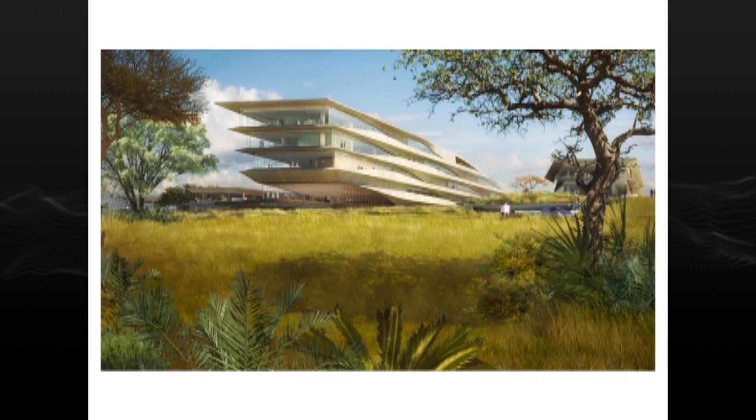And this, when you come out of the airport road, on the right is the Diamond Exchange, and this building will be on the left. They really see it as a kind of icon for the future of their tech industries. That's what you'll see as you drive down the road of the tech industry and the changing economy of Botswana, and sort of the view from the typical labs and office spaces. So this is under construction, which we're really proud of, and should be done in about 18 more months.

So the last project I'll show you is the Barclays Center at Atlantic Yards. Some of you may have heard of this project. I happen to be a sports fan as well as an architect, and I'm a born and raised New Yorker. And so the chance to build, I missed out on Yankee Stadium. I was too young, so all the stadiums have been pretty much rebuilt. So the chance to build an arena or stadium in my home city was something I was always interested in.

I don't know how many of you know the story behind this project, but it's a highly controversial project. Frank Gehry was the architect, did a master plan for 6 million square feet of housing with an arena in the middle of it, for a series of various reasons, most notably being the crash of 2008/9, they couldn't proceed with that design. They went to a design-build firm named Hunt, and Hunt said if you want to get it in the ground by a certain date, which they had to for tax law reasons, we've got to do a design build, we've got to pick an arena that exists out there and put the drawings on the site, because they had 7 months to redesign an arena and order the steel and get it in the ground. So they did that.

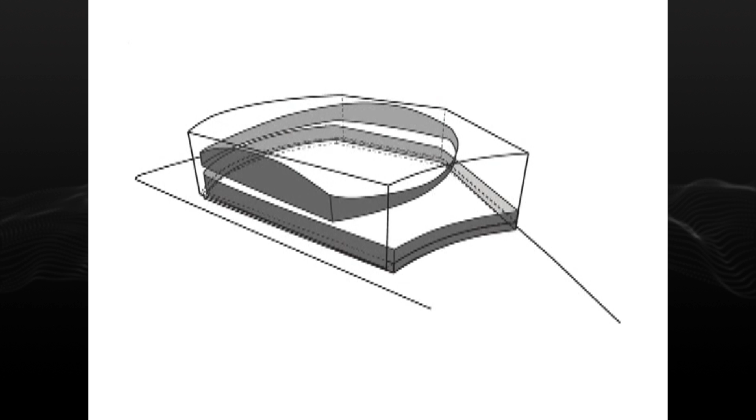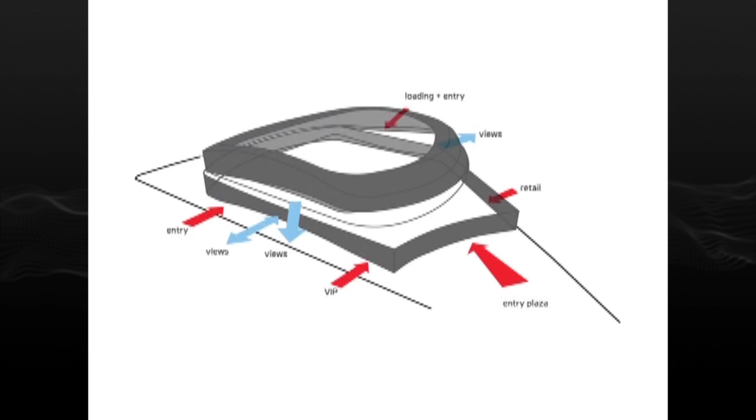So it's surrounded mostly by 5-story fabric, if you will. And we said, why don't we divide the building horizontally so that you have a kind of 5-story element, a setback, and we make it mostly glass around the middle, and then the kind of halo that tops the top part of the arena roof. Let's make sure that we lift these elements as much as possible to open them up, because I think one of the problems in stadium design is that it's dead when it's not a game, right?

That there's this blank wall, the kind of nuclear reactor in the middle of the parking lot model. And so let's make sure that the views are constant. Let's make sure that the concourses are aligned with the sidewalks or aligned with the rooftops so that people are walking, retail could be programmed in, and you get something that's more alive every day.

And then there was a large open plaza at the front, almost a full acre, with a subway station, 9 subway lines plus the Long Island Railroad stop here. It's the 3rd largest transportation hub in the city of New York. So let's make a large cantilevered, civic gesture. So we proposed the cantilever, and then we said, why don't we make a big oculus so that it's not dark under there, when you come out of the subway, you look through it and up to the sky.

And so those were the principles we designed, and this was the idea of making a series of panels of folded plate steel. We redid a taut skin, mostly glass or a dark gray metal panel, and that's the weather sealing. And then anywhere from 5 to 15 feet off the facade, this element wraps around the entire building, made of 12,000 uniquely shaped pieces of plate steel that are weathered, or you might know them as Corten, but they're not Corten. It's a new process that we've developed.

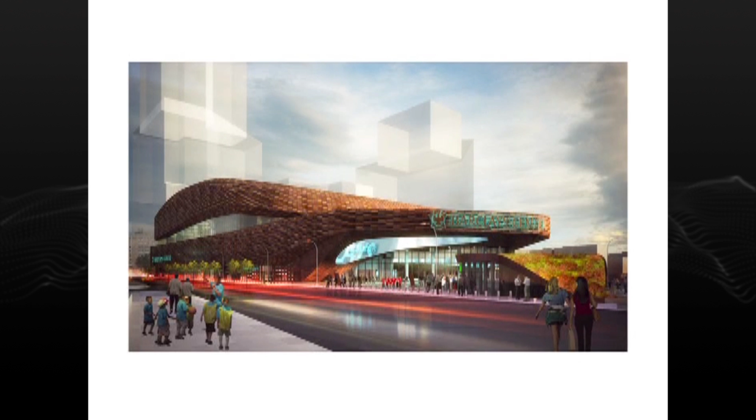So again, this idea of coming out of the subway, you see the elements as they wrap around, the glass, both at the ground floor and retail, and also at the upper concourse level. One of the great design elements is that the lobby is this large opening, and from the outside, you can actually see the scoreboard hanging, right into the bowl.

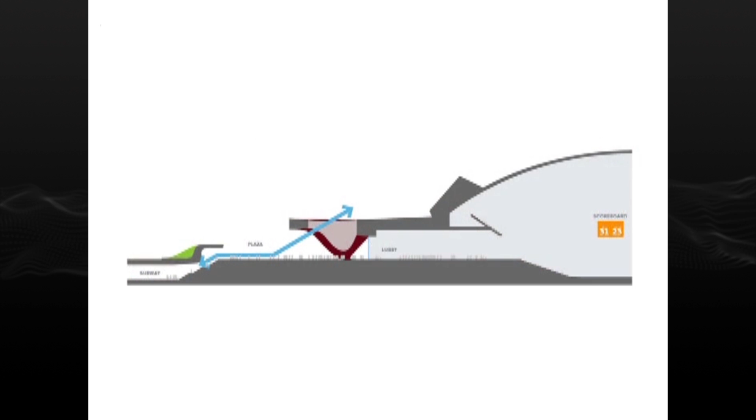The players are down below, but you can see right in. This is an 80-foot cantilever by 120 feet. The oculus is bigger than a basketball court—just to give you some sense of scale, this is 35 feet in the air, and that's 10 feet deep. It's really a civic-scaled element. You can see the upper halo, the glass, the retail along Atlantic Avenue, and then the transportation hub where you exit and look through and up to the top.

So one of the things, and then the whole thing, as we said, is folded so that it's perforated and kind of lightens the feel of the arena itself.

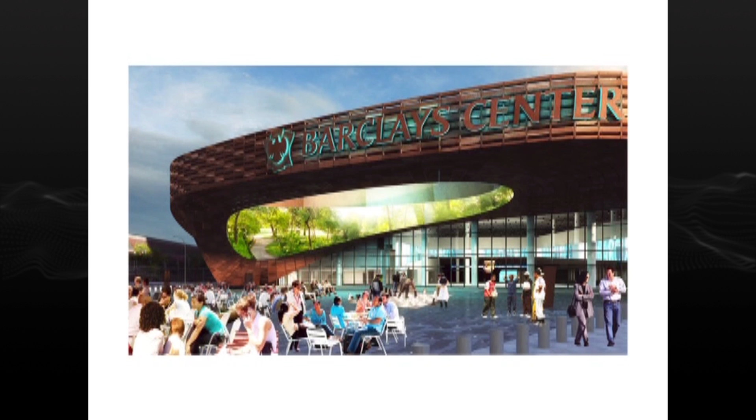One of the things we wanted was we didn't want to hang all the signage, all the Daktronics and digital signs blaring out into the neighborhood. So we convinced the client that this is really one of the great views, and could we put all the signage on the inner ring, the inner surface of the Oculus itself. And we convinced them to do that.

So this would be the view as you come up—there's the scoreboard hanging, and you could project anything on there. We're proposing that when a game isn't on, they could do live feeds from Prospect Park, and you'd have this bucolic scene floating on the inside of this monster.

Then the first three towers are going to be around the building itself. Here's the plaza and the Oculus. There's our bucolic scenes on non-game days.

And then the idea—so we did that, we detailed it, we hit the budgets, we showed them how to build it. We were hired and started to work on the interiors, the plaza, the transportation hub, the bowl, the public spaces, and now, two years later, we've also been hired, and the building is under construction.

We've been hired to design the first 1.7 million square feet of affordable housing. By the way, the first building is 100% affordable. The others are blends, and the towers around the arena itself, which we're working on now.

But the steel—the idea is that the steel ribs wrap in, this notion of streets with the dark night sky, and then the ribs making the lighting fixtures, so that the surface just comes in and folds. These steel boxes are for the concession stands and the vomitories.

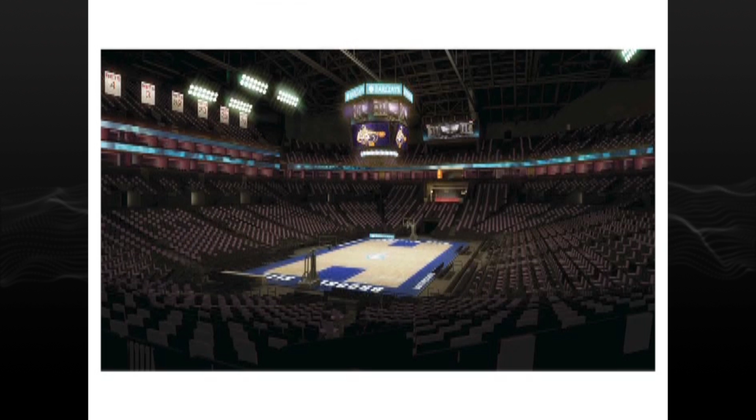But again, we want this super black, super dark, very dramatic kind of black box theater feeling in the arena. Even the bars have this kind of minimalist element—this is one of the beers of Brooklyn bars or something like that. You can see the Corten weathered steel ribs coming through.

Jay-Z is one of the owners of the Nets, so it's fantastic because we get to work with Jay-Z directly on the club design. He's an amazing man.

Yeah, I'm not cool enough, but we try. I shouldn't say it—we're being filmed, right? Yeah, all right, can't say it.

So anyway, these kind of cool boxes where bars pop into the arena itself in certain spots. And then the whole trick was, how do we build it? Because if we couldn't figure out how to build it, it was just a rendering.

So we showed them how you unfold it, using a lot of the things we learned back on the camera obscura, on the Porterhouse, on all of those buildings. And we said, this is how you do it.

All the things we've learned over a decade has led to the launching of Shop Construction as well, which is a kind of advisory CM technology joint venture company. It's a separate company from Shop Architects, but they're now building things for many well-known architects. We can take all the stuff we've learned at Shop, and you can hire them, and they'll do it, and there's no secrets, and everyone's cool with it.

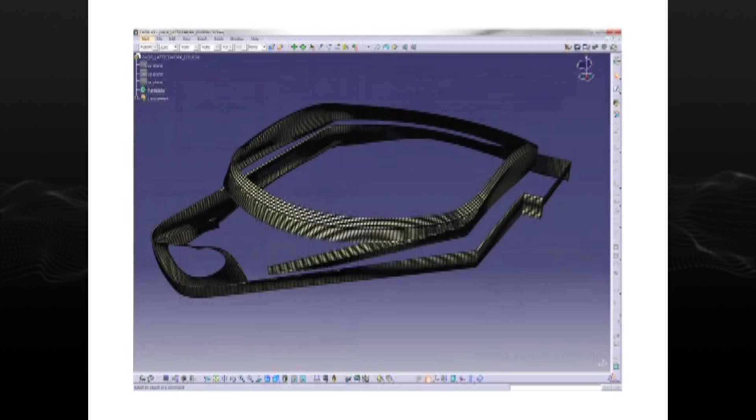So anyway, directly from the CATIA models, Shop Construction and Zahner, a fantastic facade manufacturer, are in a joint venture producing all of this. So it's really coming directly from our models to the production tickets.

There's a 20,000-foot facility built out in Indianapolis, and the panels are cut with plasma cutters, folded with computerized brakes, and hung on this kind of dry cleaning rack, if you will. They go through 16 wet-dry cycles a day, and it takes the panels 4 months to go through the entire factory. When they come out at the end, they have 10 years of patina on them.

They're all tagged with barcode systems, and we wrote our own iPhone app where you can go up with an iPhone at any one and scan it. It shows you how far along it is in the process, where it goes on the building, which mega panel it goes on, and where it is in the delivery process, so that anyone from Bruce Ratner, the owner of the stadium, to the guy screwing the bolts in, can at the same time go up and scan any piece and know exactly where it goes. So this is a shop construction product.

There are 12,000 panels that get assembled into 921 mega panels. The mega panels are designed to be exactly the size of a truck that's allowed into New York City, and they're driven in, about 2 a day now coming in from the Midwest.

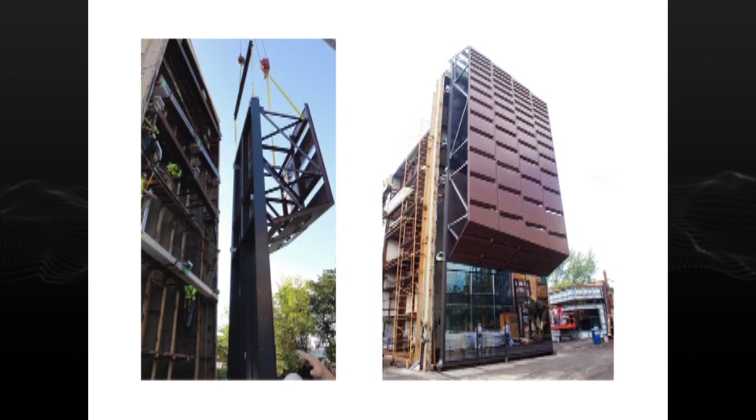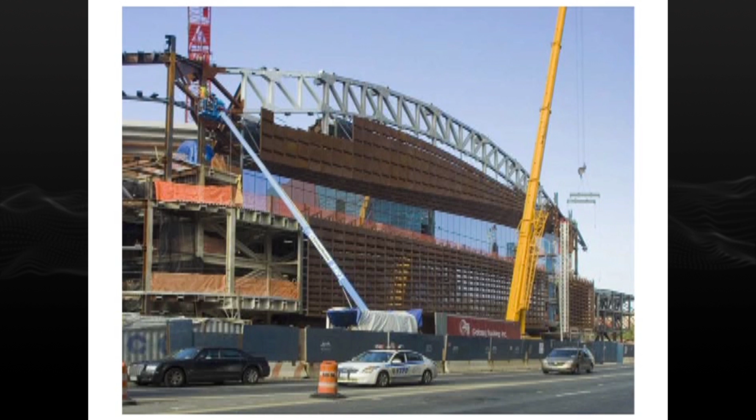These were the first mock-ups of the panels where we were testing them down in Florida for leaking and hurricane strength. This is just the other day - some of the panels going up on the side. We've got about 70. It's not a very good photo, we just took it with the phone, but about 70 of the 900 mega panels are already up, and you can see it going together.

Every one of the folds, all of the perforation and the kind of glass was all set by the zoning code, because there were requirements for how much glazing. So down to the square inch, we have it right.

We did a highly reflective glass, sort of very 70s, if you will, because we wanted the sunny day to sort of come through it, and then at night it's reversed anyway and you don't see it. The other day we were there and there were white puffy clouds on a blue sky, and I thought, this is like Magritte and Serra's nightmare child that came together.

So in conclusion, at the end of the day, architecture is the last great generalist profession. But what I'm afraid of is that the AIA and other institutions have tried to make us specialists, in the production of aesthetics and renderings and the image of buildings. But what we're great at is the thickness of buildings, all the stuff that goes into it.

We are the people whose skill set is that we know a lot. We know something about a million different things, and we synthesize them together. When you're on the job site, you know more than the banker because you know all the other things. You know more than the owner because you know all this other stuff. You know more than the contractor - they know more about each one of their specialist things, but you know more in total about everything going on there. So don't give up that quality.